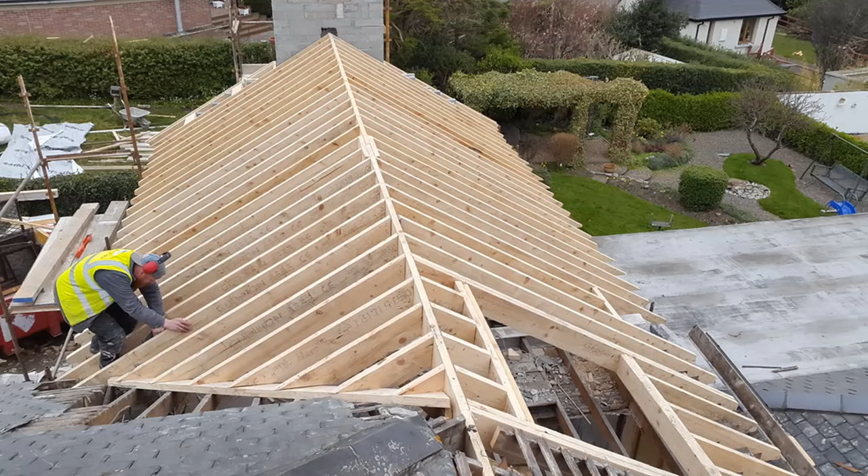In today's lesson we're going to look at drawing out the passive detail for the eaves of a roof. So what we have here, this is done in block construction. So we have an outer leaf of 100, we have a cavity of 250 mils, and then we have an inner leaf of 100 mils. We have an insulated block in this location here.

What we have then is a wall plate up here, a standard wall plate of 100 by 75. We also have another wall plate positioned here to take the weight of this rafter because of the wider cavity now. And what we also have here is a lot more insulation.

So we have 300 insulation in the attic here, we have rigid insulation between the rafter, and then we've rigid insulation finishing off the top of the cavity here in the wall. And then also we have an insulated plasterboard on the underneath of the ceiling here.

So to start off this drawing, we'll begin with the wall. So to begin with the wall, what we're going to do is measure out 100 mils. So this is going to be drawn scale 1:5, so I measure out 20 mils here, then I measure out 50 mils, and then another 20 mils here. So this will be all drawn to scale 1:5.

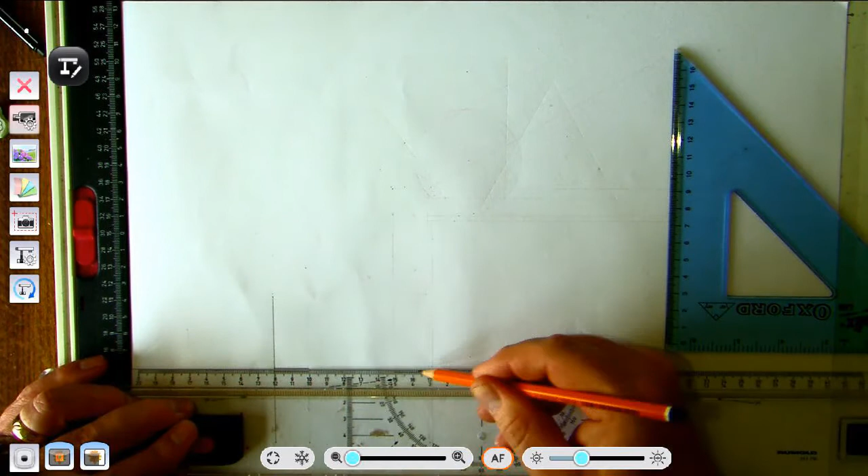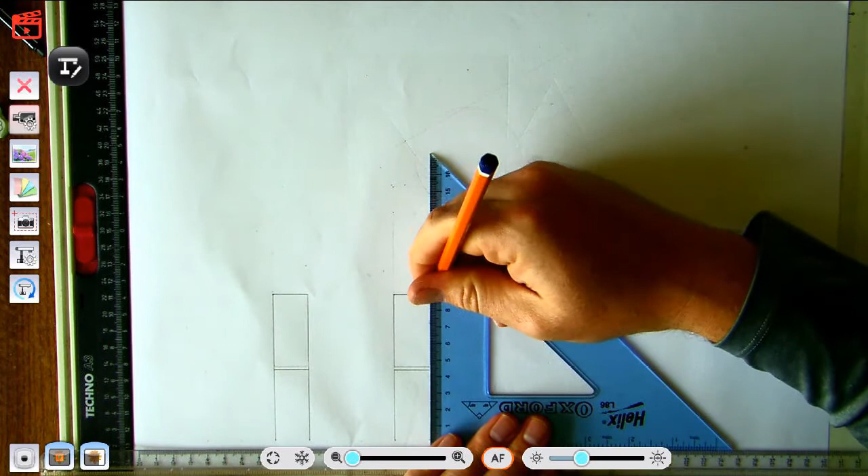So that's my outer leaf done. Now to do my inner leaf. Now above the inner leaf, what we have is another 10 mil gap here. So we measure that here, and then we measure up another 215. And this is for our lightweight insulated block.

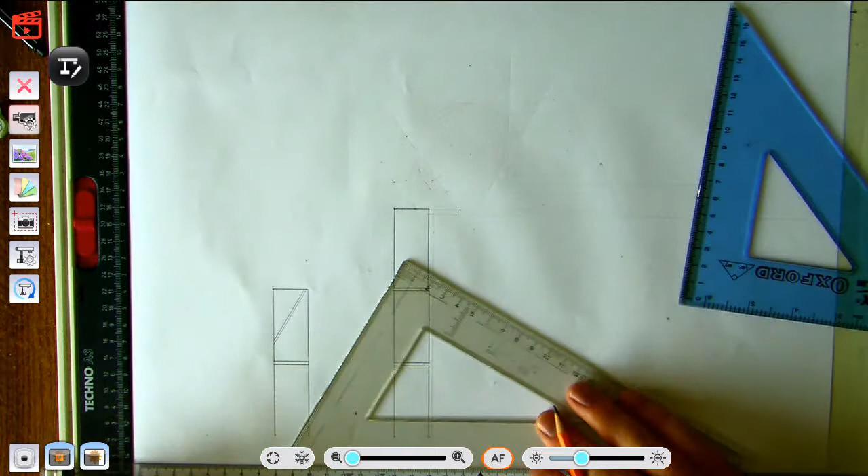And then it's a good idea at this stage to start drawing in symbols for the blockwork. So the symbol for the blockwork is, I tend to use two lines at 60 degrees close together. And then we do the inner block here. I just staggered over two blocks in this case here.

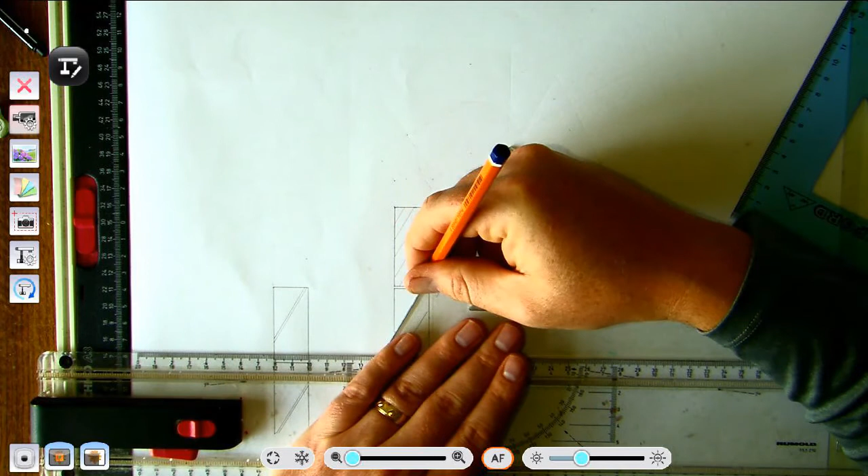And then for the insulated block we do it slightly different so we can see that it's a different type of block. So I'm going to draw a series of lines at 60 degrees. So that we can see that there's two types of blocks drawn here.

Now, from here, we're going to draw a wall plate. The wall plate is 100 by 75, the same in passive construction. So what we're doing here is measuring up 75. And again, remember, this is scale 1:5, so we're measuring up 15, and we're measuring across here 20. Now, because it's a wall plate, we know it's a piece of timber, so we're looking at the end grain, so we put in the symbol for the end grain, which is an X.

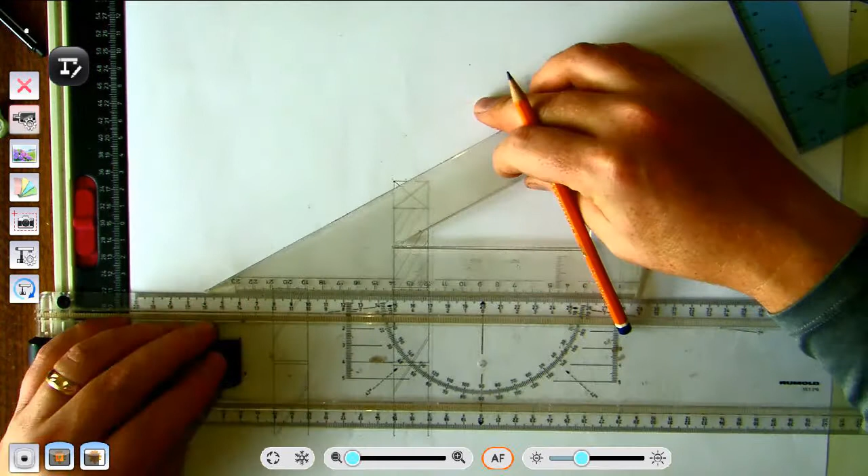Next, we're going to draw in the rafter. So, to draw in the rafter, we start at the edge of the wall plate, the outer edge, top left hand corner, and we draw a line here at 30 degrees. So this is the same for any pitch roof drawing, that we start off here. Or we bring down this line 30 degrees.

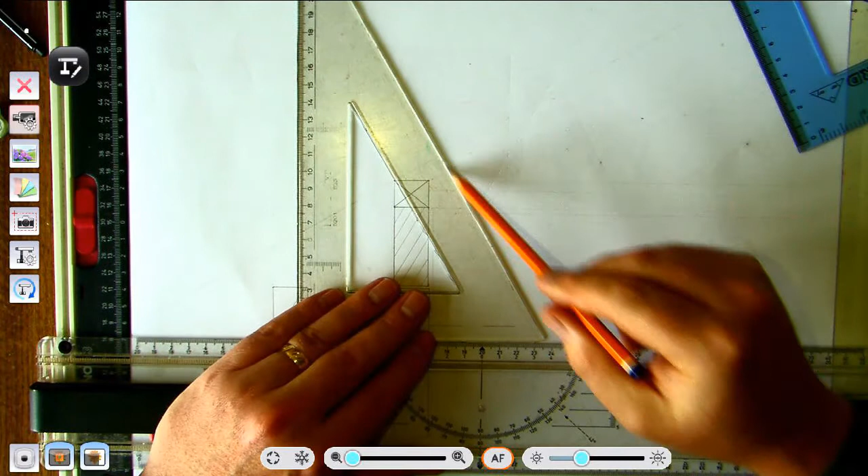Now we set up a line here at 60 degrees, and then what we're going to do is measure our rafter. So our rafter is 150, so we're going to be drawing it 30, so we measure out 20 and measure down 10. That gives us our top and bottom. So what that allows us now to do is we can draw in the bottom of the rafter. So this here is the bottom of the rafter, and then I'll continue on the bottom of the rafter.

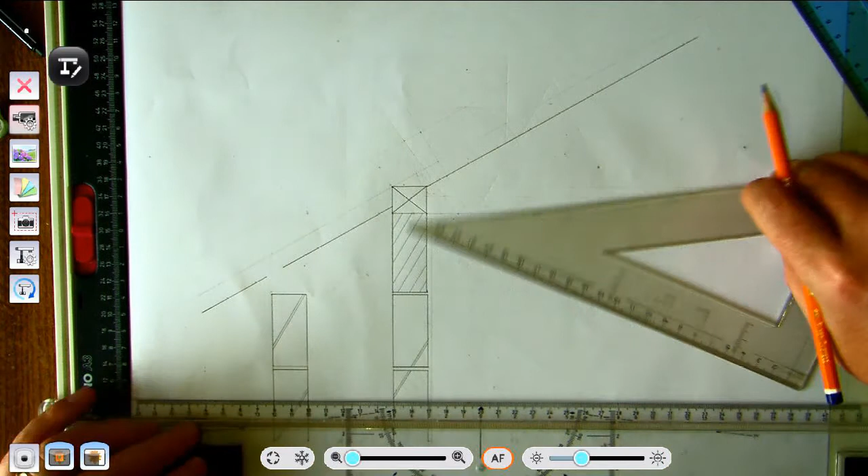I might leave a small gap here because I'm not sure where the wall plate's going to intersect with it, and then I'm not going to bring it down here fully because I want to see how far out we're going to put our soffit and fascia. Now, while we mention soffit and fascia, we might as well do a bit of measuring for it.

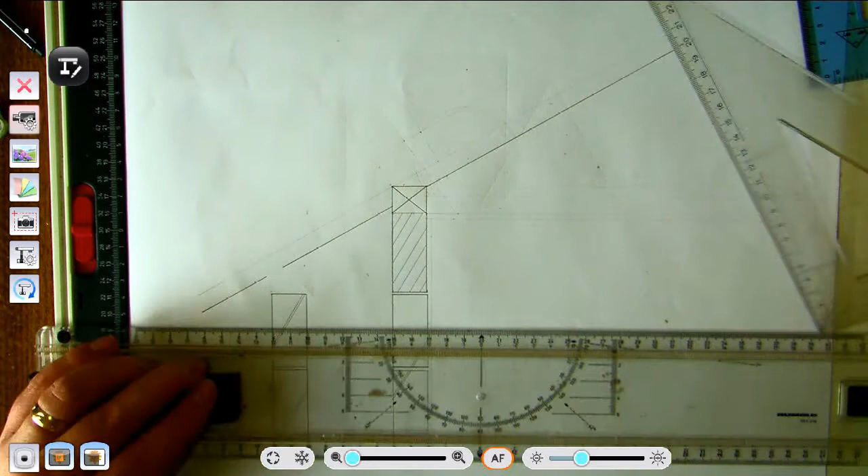So what we'll do in this case here, we'll put on soffit and fascia of 300 mils. So what we're going to do is measure out 300, bring a line up, and where that line intersects with this first line that we drew at 30 degrees, bring a line in here.

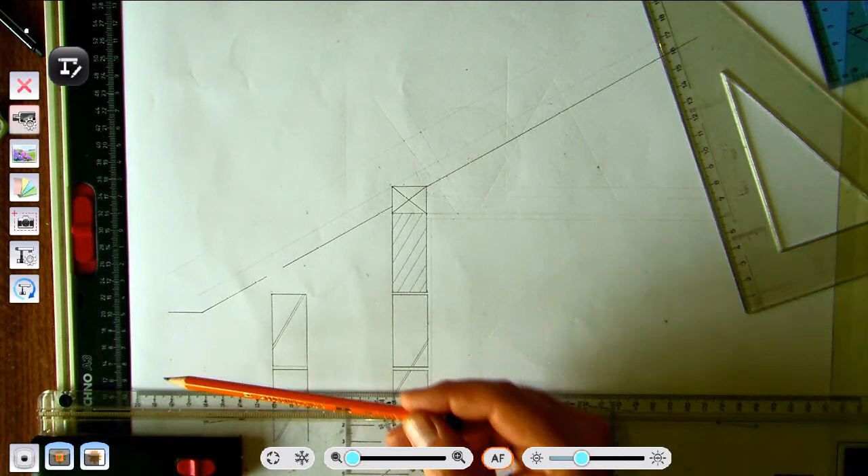So that gives us our bottom of our rafter here. And again, it'll also give us the top of the rafter now because we can extend on this line down. So what we've now found is the top of the rafter here. And how that's found again is from the wall, measure out your 300 mils, bring a light line up where it cuts into this 30 degree line, bring a line across from it, bring a line up, and that gives us our plumb cut and our seat cut in the bottom of our rafter.

So we can draw in the end of the rafter here. Then we could draw in the top of the rafter in a bit heavier now. And we'll extend this up. Wait.

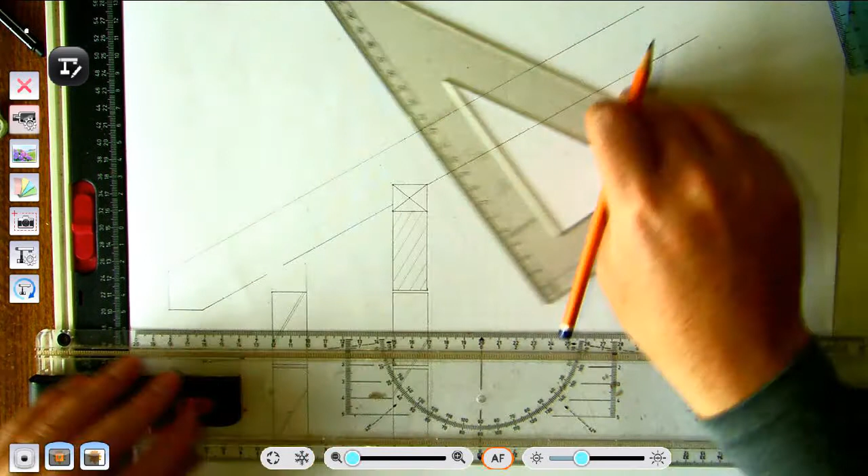Now, with the rafter drawn in, we can draw in our second wall plate. So our second wall plate, again, it's the same size, 75 by 100, so that'll be 15 by 20 on your drawing. So you can see where it's cutting into this rafter here. And again, because it's a wall plate, we'll show the end grain, so I'll X through this here.

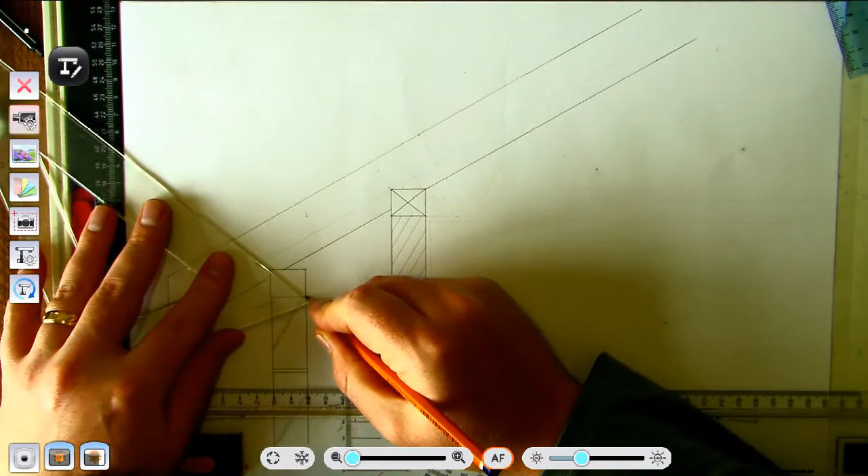Now, once we get to this stage, better start putting in some insulation. So the first piece of insulation I tend to put in this drawing is into the wall here. So I'm going to put in the rigid insulation. So this here is 50 mil rigid insulation. So we'll measure up a line 50 here. So where I measure this from is from the bottom of the wall plate here, up 50, and that's our piece for rigid insulation. So to draw in rigid insulation, what we do here is lines here at 45 degrees.

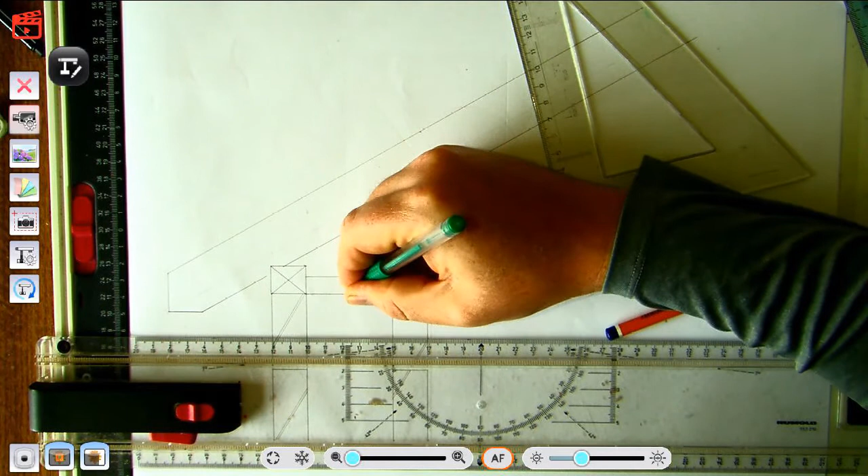Now you could measure how far apart these are, but there's no real need. And then 45 degrees here. So this here is our symbol for rigid insulation.

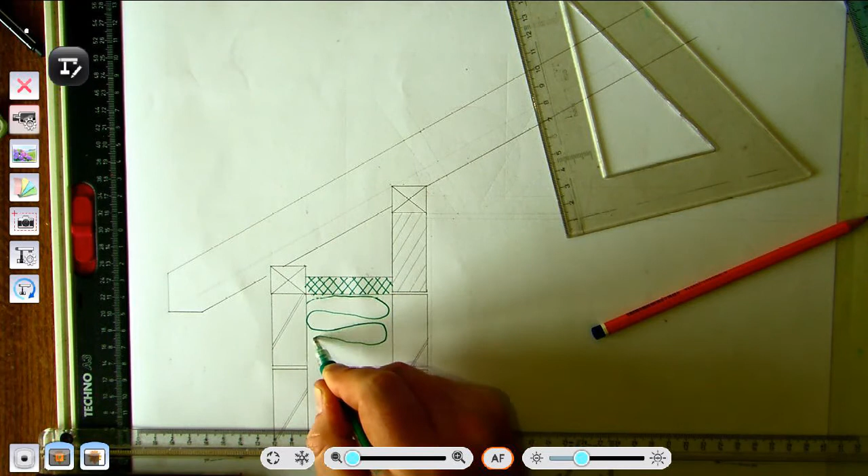Now underneath it now we have loose insulation. So again, the symbol for loose insulation then is more freehand curves. So it's wide here, gets narrow here, wide, narrow, and so on down along. So this just takes a bit of practice here drawing in these. And so on down to the bottom section of the wall that we've drawn in. So that's our loose insulation put in.

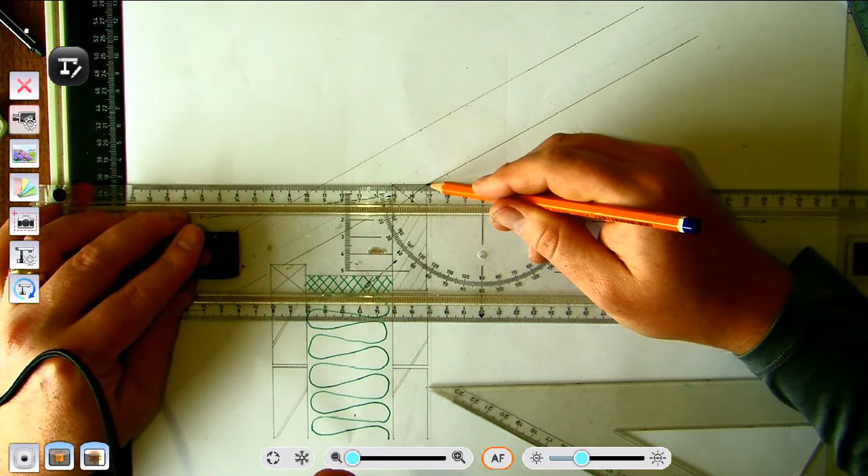Now if we move up along the drawing then, what we have to do is we have to put in some rigid insulation and some loose insulation. So basically when we get to this stage here, what I tend to do is I tend to draw in my ceiling joist. So my ceiling joist, as in a normal not passive construction, your ceiling joist will be resting on top of your wall plate.

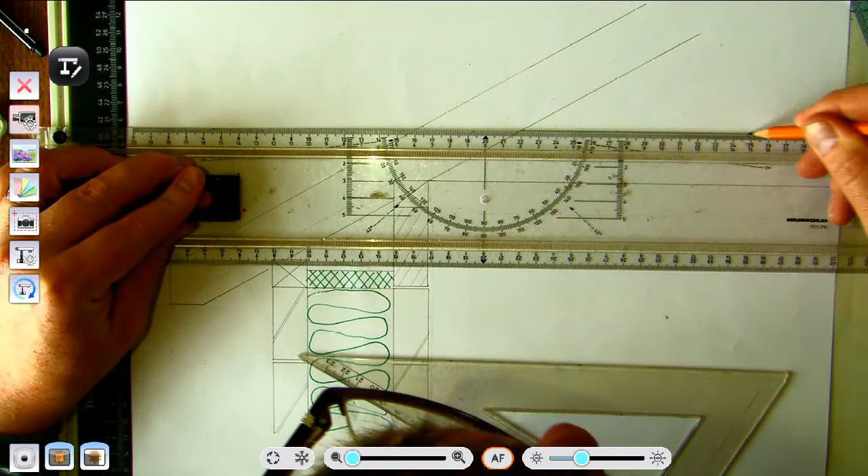So I can draw this in here, and we're going to take it in this question here that there's no room upstairs, so we're going to put in the same size timber as we have for the rafter, so up 150 for the timber. So what we're going to do here now is draw a line across here. So this here is our ceiling joist now put in.

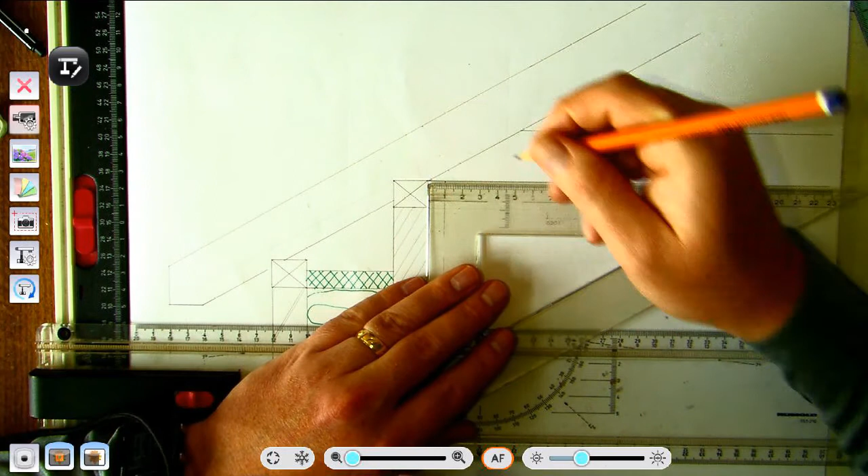Now in this drawing here we're super insulating this house, so what we have to do in this case here is put on battens first of all. So the battens here are measuring across here 50, so we're going to measure across here 50, going to measure down here 25, so we're counter battening this roof here. So in this case here we're counter battening here, and then below this we're going to go 400 centers. So from the center of this one to the center of this is 400, so it'll be 80 on your drawing.

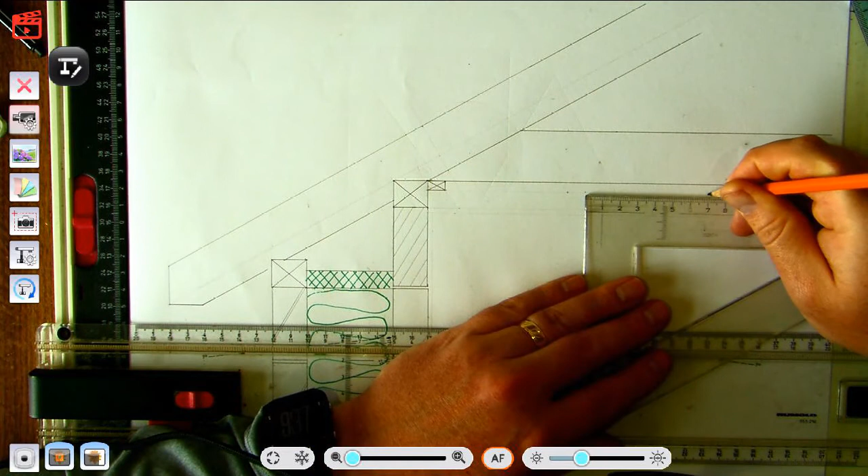Then we'll measure across 50, then we'll do the same for this one here, measure over 400, and what we'll do here then is line up here, line up here, line up here, bring our lines across here. So these are our battens that are 50 by 25.

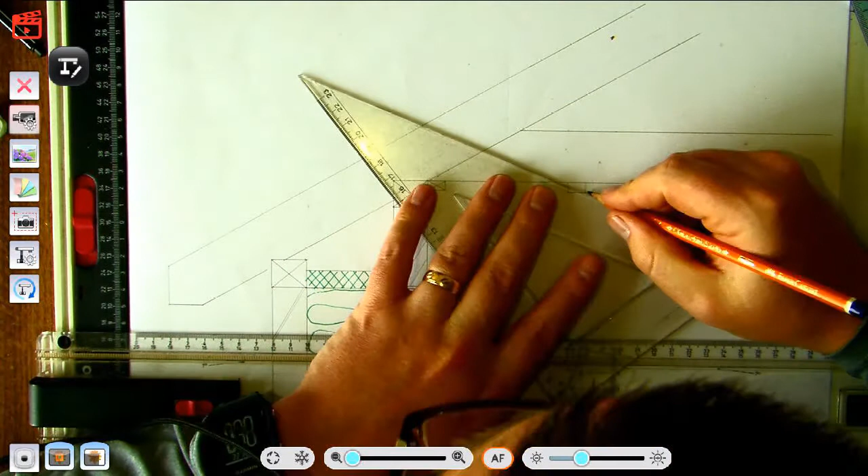Once we've that done, we'll draw a line across here to show the top of the insulated plasterboard. Then we're going to measure down 50. Draw a line across here. And then down 12 mil, which will be probably close to 15 mil, so probably down about 3 mil on your drawing here. Draw a line across here, and that's actually our plasterboard.

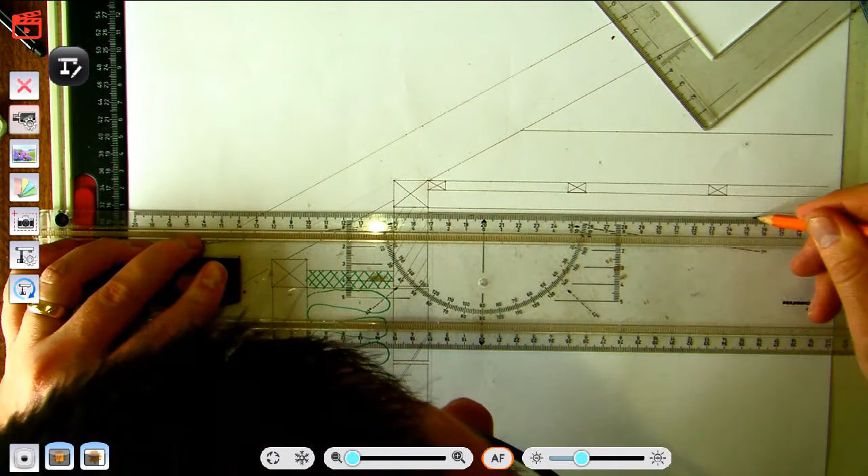Now, while we're at this stage, we might as well put in the plaster on the wall here. So we'll measure out 15 mil. So we draw our plaster on our wall now. So we have our plaster on our wall put in.

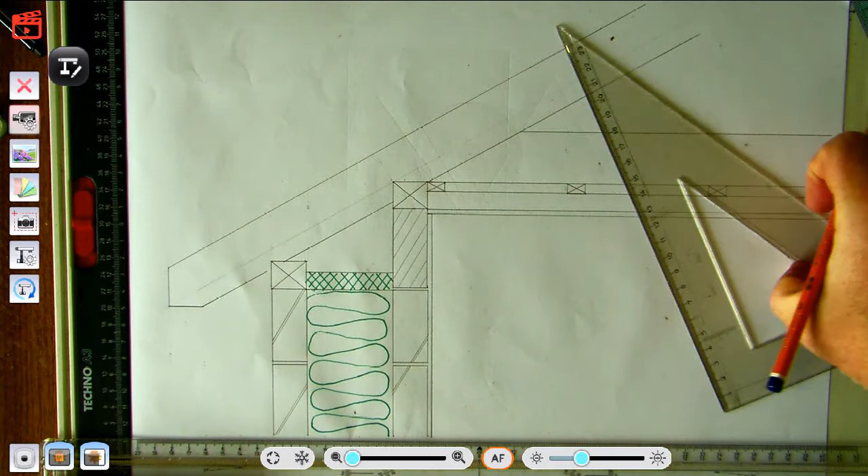Now we might as well put in a few symbols now for insulation. So again, this is going to be rigid insulation. So again, at 45 here. Now this can be done in pencil. I tend to draw it in pen just so that it stands out. Now you just have to be a bit careful when you're drawing it in pen. And then just 45 degrees in the opposite direction here then. Now you could put in as many of these as you want and as close together as you want.

So that's our rigid insulation put in for our plasterboard. Now when we're at this stage here, we're as well to put in our airtight seal. Because it's passive construction, we have to have this house airtight.

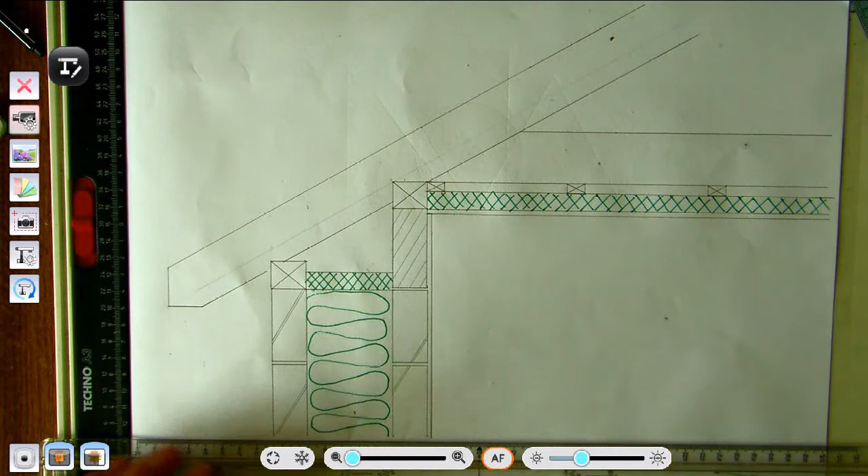So our airtight seal is an angle here of 90 degrees. So it's a tape that's put onto the wall and put into this location, so it's taped in here so that any heat from this room here gets to this point here and won't travel any further. Okay, so that's our airtight seal, and that's where we place it in our drawing.

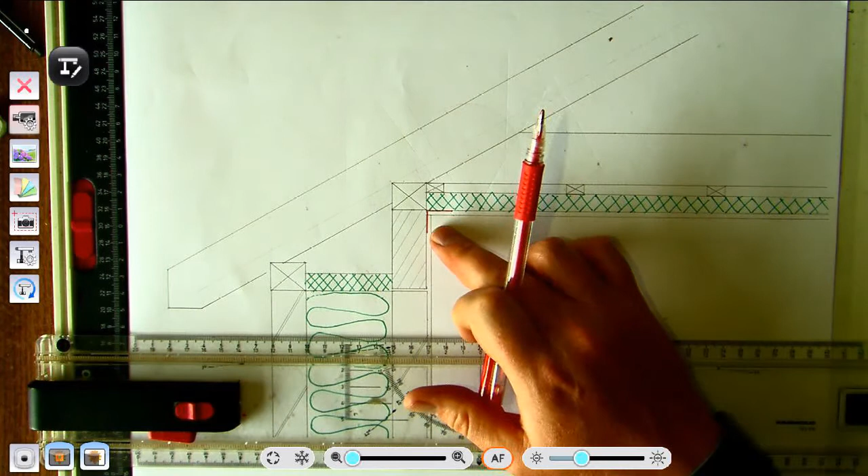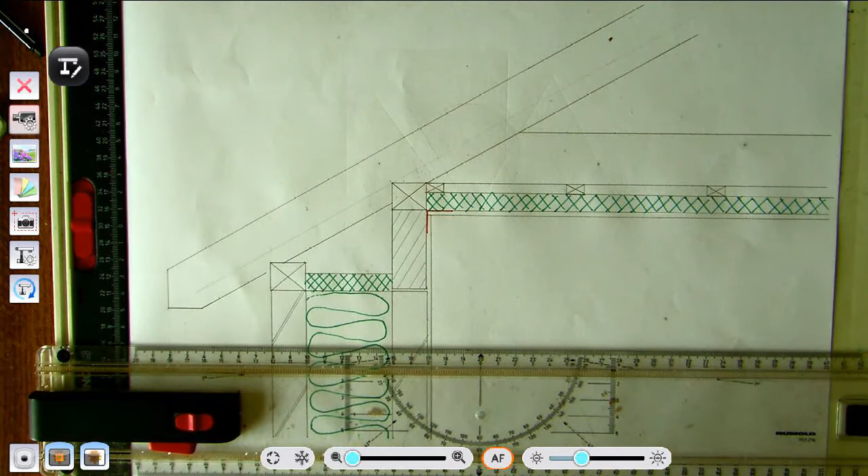Next we'll look at putting in some rigid insulation now into the actual rafter, because once we have the rigid insulation put in, we can start putting in the loose insulation. Loose insulation is a lot easier to put in. So on the drawing here, I'm going to measure down 30 mil, pick a point there, then with my 30 degree set square, draw a line here, so this is going to be a heavy line.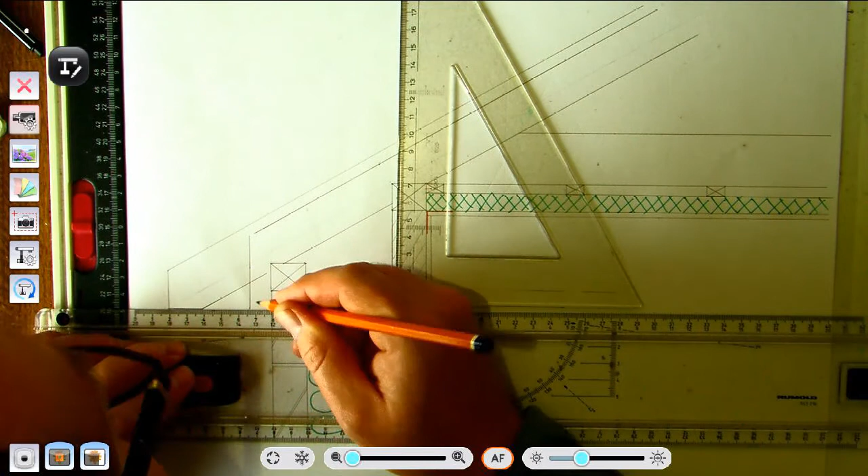And what we're going to do in this case here is put in 60 mil of insulation. So from this point here in the wall plate, I'm going to measure out 60 mil, bring a line straight up, and then to find the lower point here, bring it level with the seat cut on the end of the rafter. So that's the end point here for that rigid insulation. And again, the insulation was 60 mil, so I'm going to measure my 60 mil here.

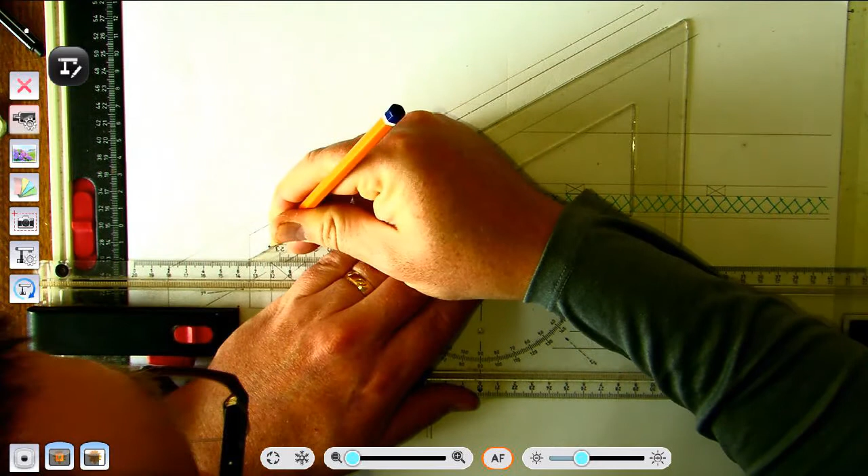Now what we don't have in this drawing here is an eaves ventilator. The reason we've no eaves ventilator in this drawing is we're going to have a gap along here. You'll see it a lot clearer when I put in the symbol for the insulation. So we've no eaves ventilator in this drawing question because of the way we're putting in the insulation. So again, this is our rigid insulation. There's quite a lot of rigid insulation in this question here. So put in our lines here, all the way up along our drawing.

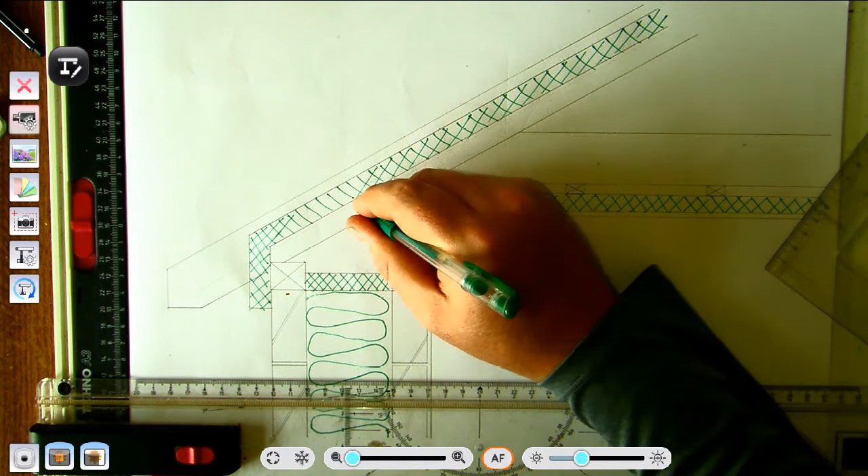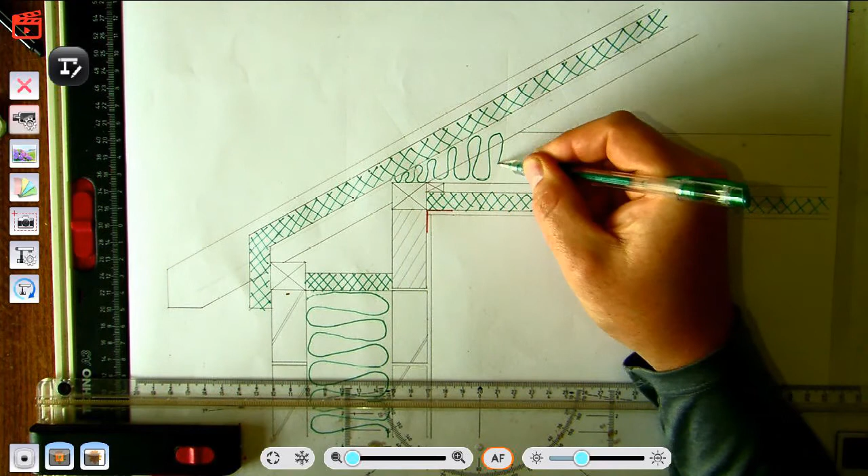So that's our rigid insulation now put into our drawing. Now when we're that much done, we can start putting in loose insulation. The loose insulation in the attic, there's going to be 300 mils of it. So first of all, we start off placing it in here, and obviously it's done in layers. It's packed up along here. So the first one goes up to the top of the ceiling joist.

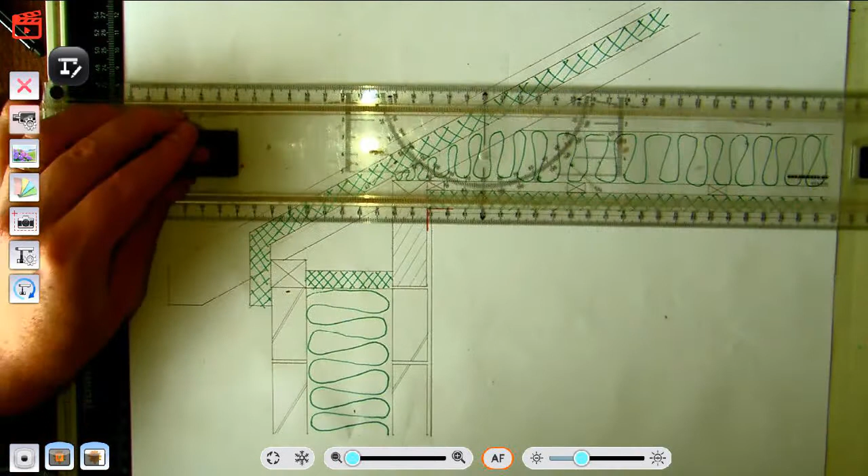And again, symbol here. It just takes a bit of time to get used to drawing it, going wide and narrow, as you're putting it in here. So that's 150 mil insulation. What we have to do now is draw in another 150 mil above it. So on our drawing here, we'll measure up 150 mils. Draw a light line across here, because the heavy line is for the timber. So we're going to start here somewhere again.

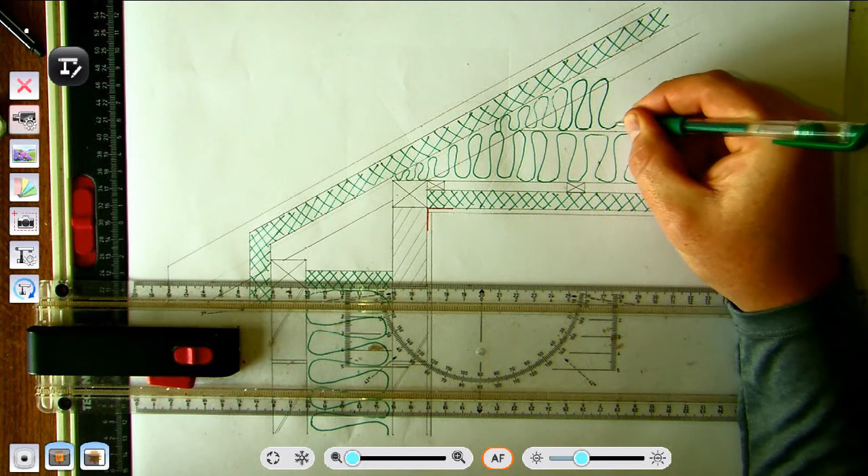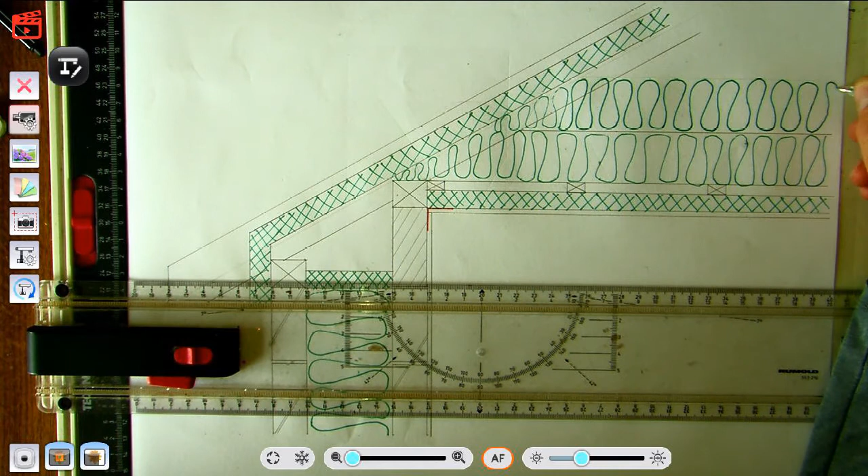So this here is our final piece of insulation in our attic. So we've all this section now filled with insulation. Next we have more insulation to put in. The last piece of insulation is all this section here has to be filled with insulation. So again, this is going to be loose insulation. So again, we go wide, then narrow, wide, narrow, and so on.

Right, so that's all our insulation. Now, that completes all the insulation in this drawing. So what you'll notice now is this house is super insulated. This is what it's called super insulated when we put in this much insulation into the drawing.

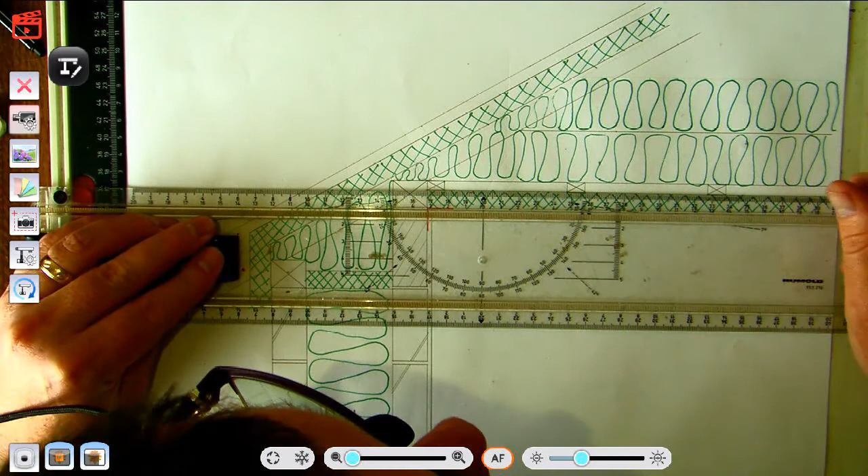Now to move on from there, another detail that's found in passive houses, we have a vapor barrier. A vapor barrier is basically a sheet of plastic that is put between the ceiling joist and the actual ceiling itself.

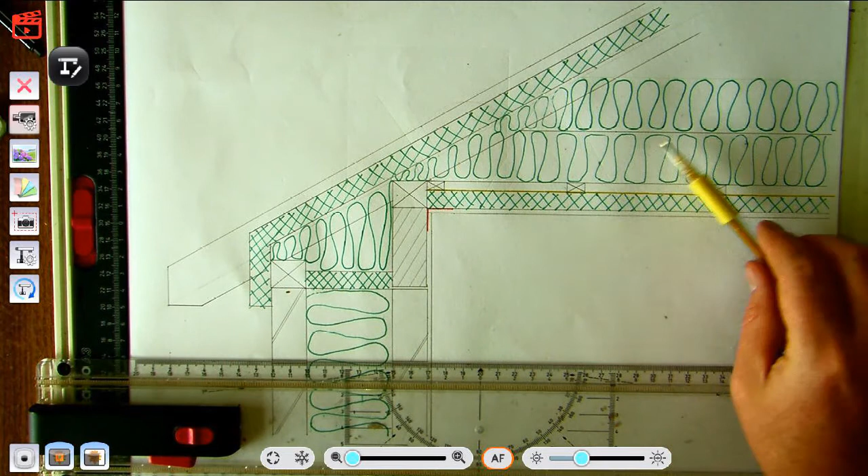So what we have here is a sheet of plastic going across here. Now the reason it's put in is vapor. If we think of vapor, we think of water vapor. We don't want any water vapor getting up onto this loose insulation, because if this loose insulation gets any moisture in it from water vapor, say for instance in a bathroom or a kitchen, it's going to leave this insulation not as effective as it should be.

So this here is the location for our vapor barrier placed in along here. So it's just a yellow line on our drawing here. Now we move on from here, we'll take a look at dealing with the actual soffit and fascia over in this location here, and we'll start putting on a few tiles onto the roof and a bit of maybe felt as well, or breather membrane, which is now used, and we'll put in our gutter as well.

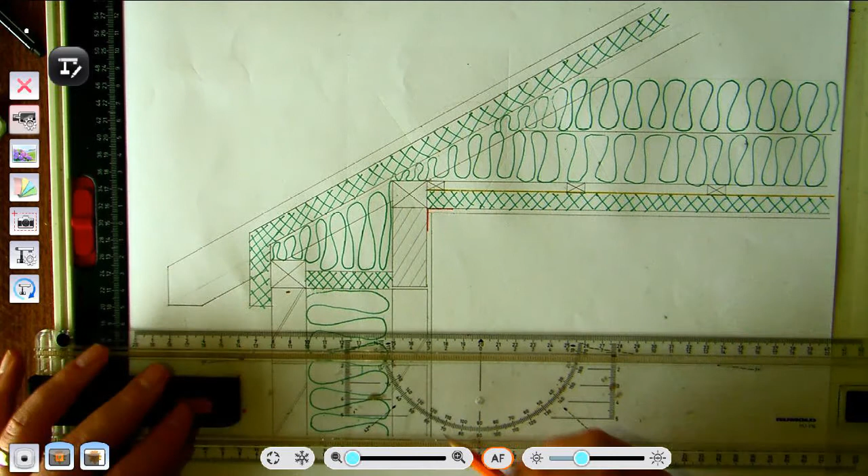Now, to start drawing in these details here, the first detail we'll put in is a line going across here. This here is the top of our soffit, so we'll measure down here, and we'll say it's a 20mm piece. So we're going to measure down here 20mm. So this here is our soffit put in.

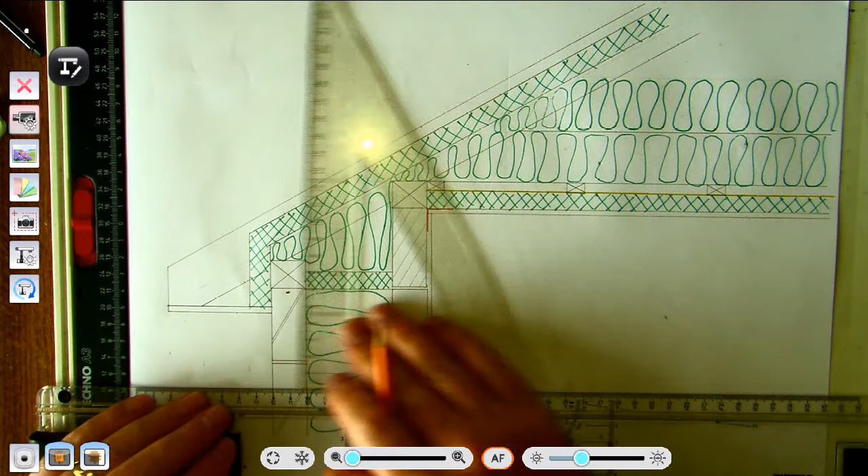Now what we'll do here is we'll just draw another line here, or a series of lines here. The series of lines here will show where the vent is. So we've a vent here allowing air to go up through here and vent the whole roof, so that we've no likelihood of dry rot occurring in our roof.

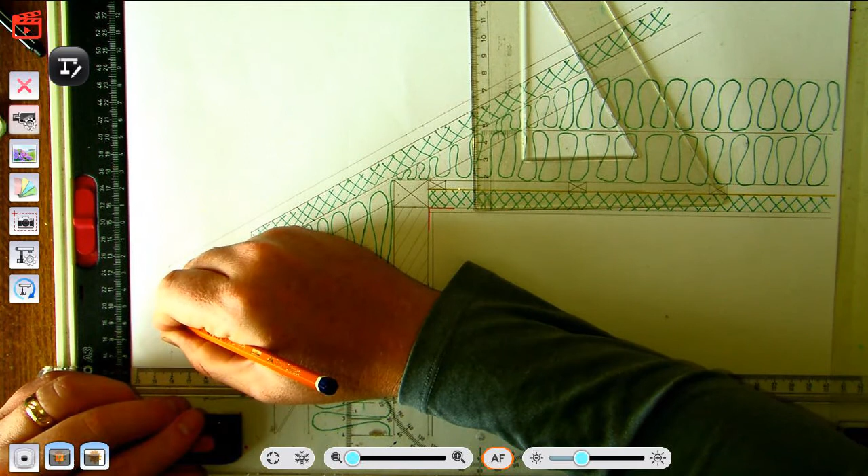Now next thing is we measure out another 20mm here, and we measure out for our fascia. So measuring out for our fascia here, two light lines. Now we'll bring it down maybe 20mm past. Measurement here is not that important, how far down we bring it past. Then we'll bring it out here, and normally on the bottom of the fascia you'll notice there's a few rounded mouldings, just to show a design on the bottom.

And then to get the top of the fascia here, again, measurement not crucially important, we'll measure up 10mm in this case here. So we'll measure up here 10mm. Now bring a line across here.

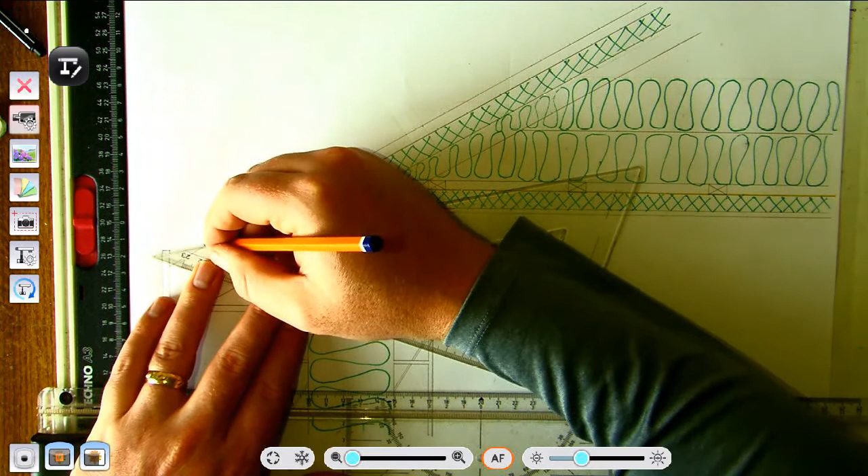Now what we'll do in this location here is we'll draw in a sloping line. The sloping line here is actually a really important piece. That's called a tilting fillet. So this piece of timber cut in this triangular shape, the tilting fillet, and its main function is to stop the breather membrane from sinking down into this gap here. So you'll see now I'll draw in the breather membrane.

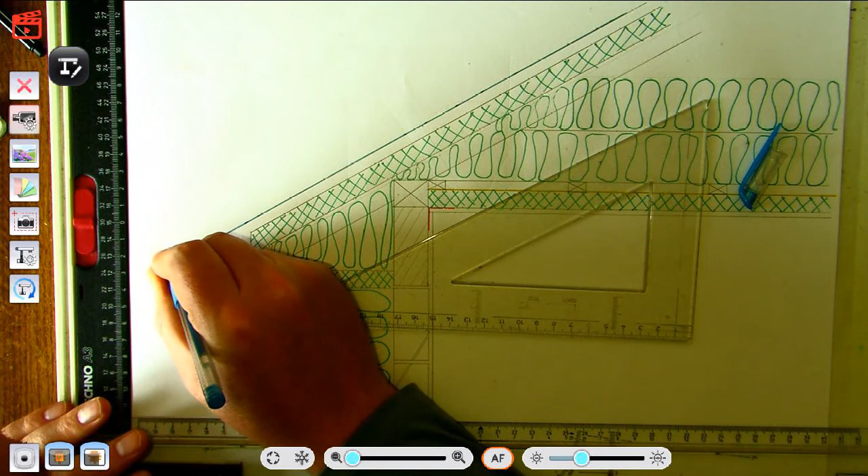So in this drawing we'll draw it in maybe in a blue pen so that it's different to the rest of the drawing. This used to be referred to as felt, but now in all roofs felt is no longer used, it's all breather membrane. So it's this blue line going across here, on top of our rafter, then on top of our tilting fillet, out across the fascia, and then sags down here. It goes into the gutter at the end of the sheet. So we'll be able to draw in the gutter in a few minutes.

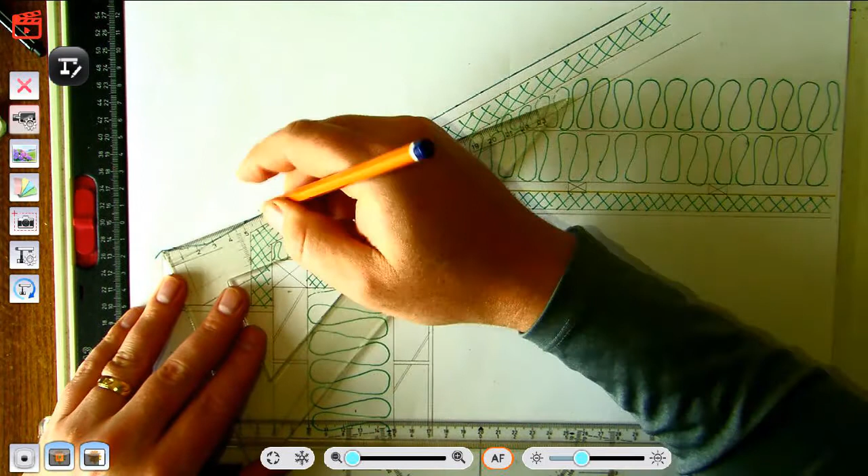Now next we'll start measuring out for our tiles. So we'll put tiles on this roof. For the first point here, from the corner of our fascia, measure up 300 mil. So make a mark there, and then from that mark measure up 300 again. So on the 300 mark we're going to put in our battens.

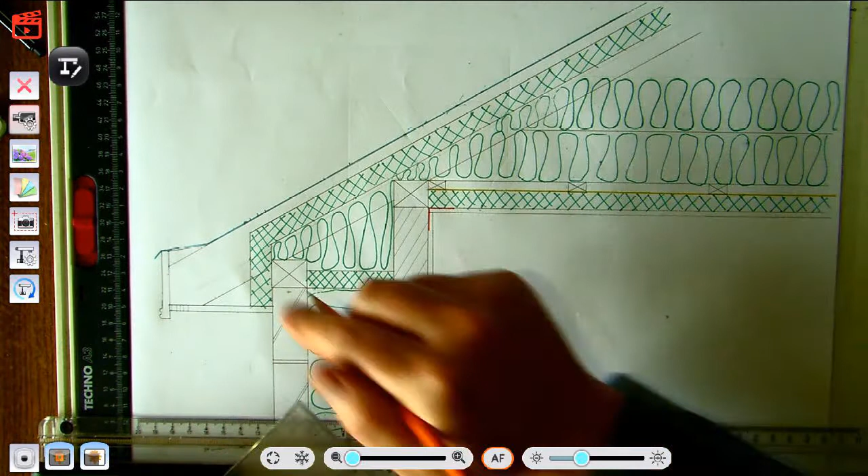So in this case, because we're putting in tiles, from this 300 point we measure down 25 mil, up 25 mil, and then measure out here 35 mil. So remember, all of these are to scale measurements. So anytime I mention a measurement, you just divide it by 5. So I'm measuring out here 35 mil, which on my drawing is going to be 7.

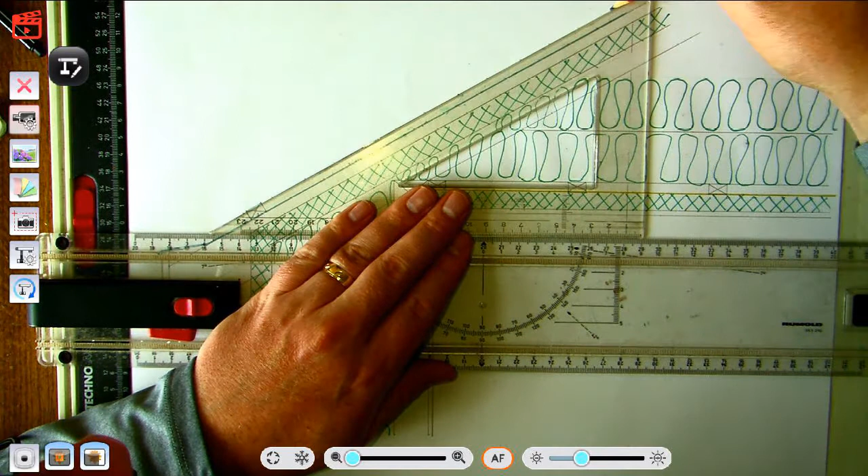So what I've drawn here is our first batten, and you'll notice for tiles they're slightly larger than if we're slating the roof. So this batten here is 50 by 35. Now that's the first one, and the reason I've drawn the first one is, if I bring a light line up now, I'll get the top of the next couple of battens. So I'll tend to draw another 2 or 3 more battens in here. So again, measuring my 50 mil, and then I'll measure up here my 300.

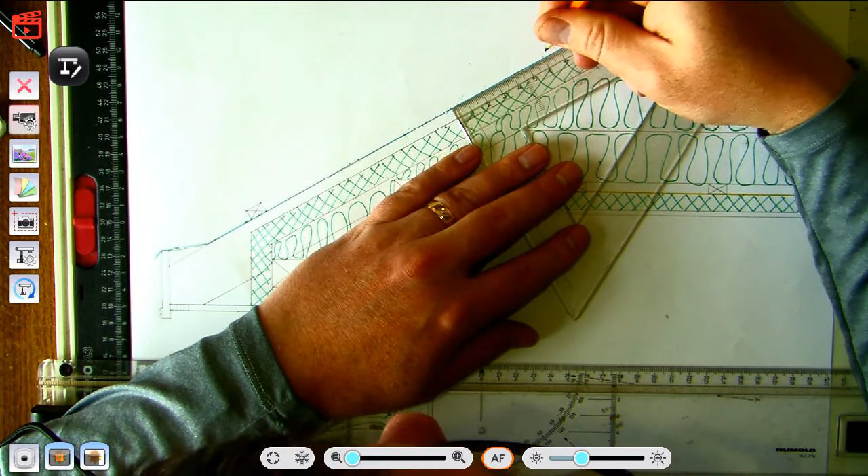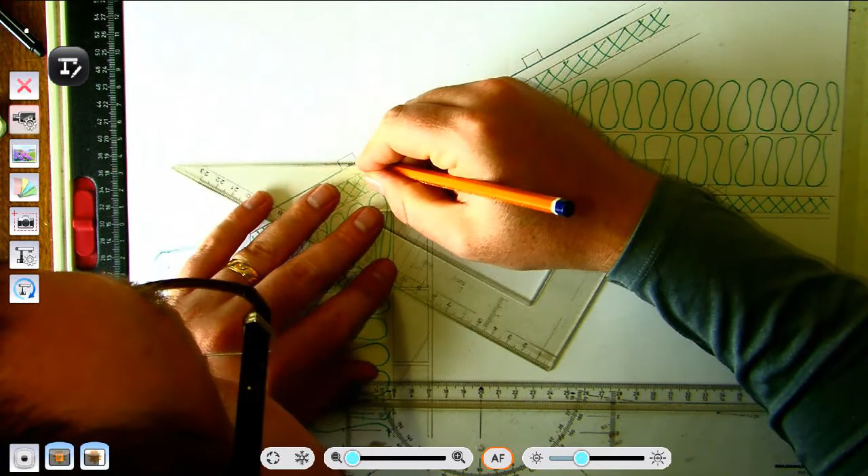I might measure up 300 once more. And because I have the roof drawn at 30 degrees, I'm able to use my set square now at 60 degrees to draw in these battens a lot quicker. Then we draw in the top of these battens. I did put in X's to show that it's end grain that we're looking at, that these are running in and out towards the drawing, so the same direction as the wall plates are. So that's our battens placed in.

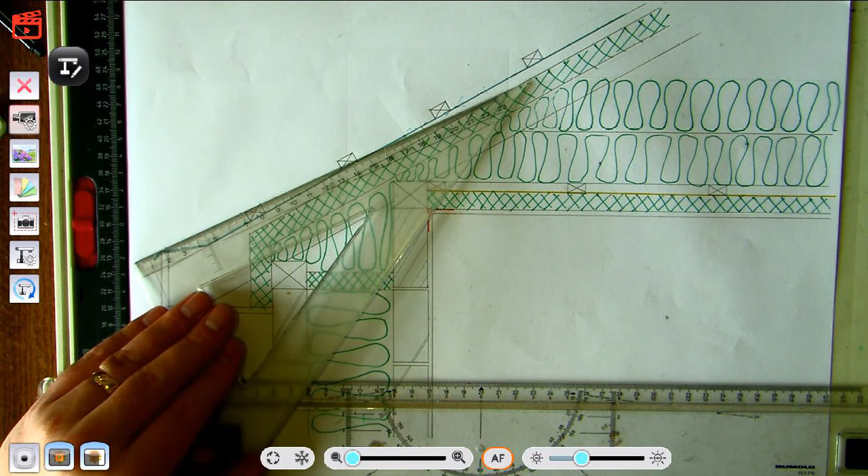Now the next thing that we have to place in our drawing is actually our tiles. So measurements for tiles are 420 by 20 mil in thickness. So basically on this drawing they're going to be measuring, we'll say, 84 mils. So to do this on your drawing, what I tend to do here is go from this point here. So measure down 400 mils. So it's 80 on your set square. So measure down here 400 mils.

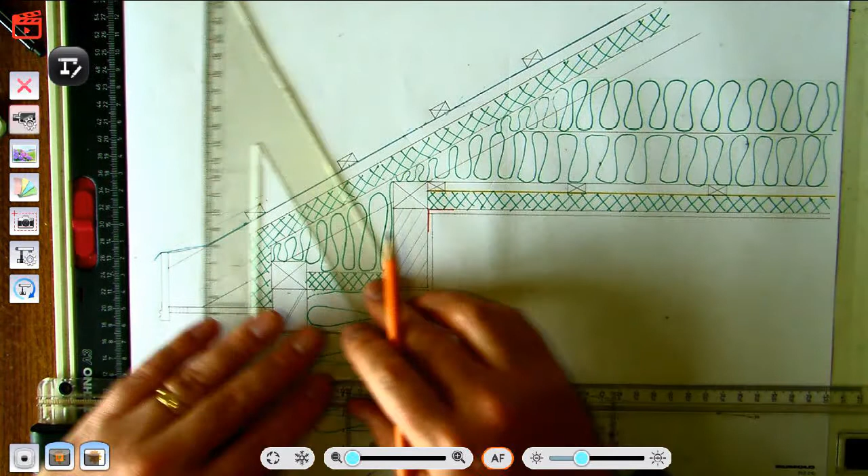Now, because I know this is 84, I'm going to measure back here another 4 mils. Now this is quite an important 4 mils here. What we're going to do here is measure out here 4 mils on your drawing, and somewhere up here, measure out 4 mils on your drawing. What we'll do is set up a light line then on top of this. And what we've now created is the end of the tile here.

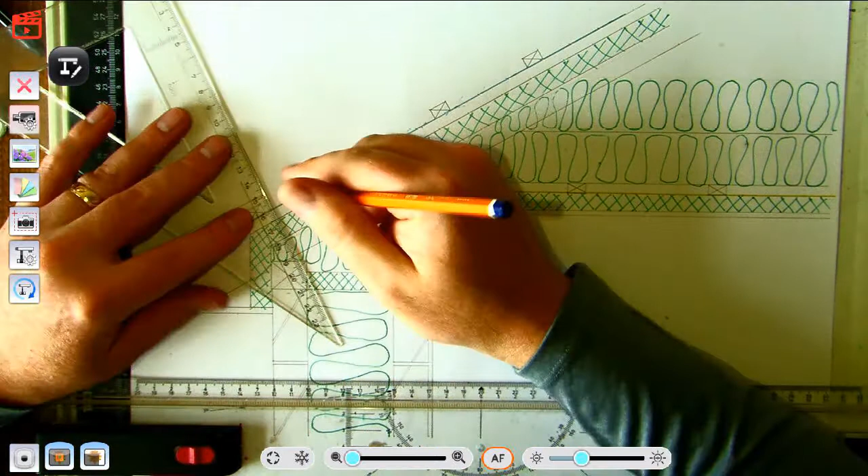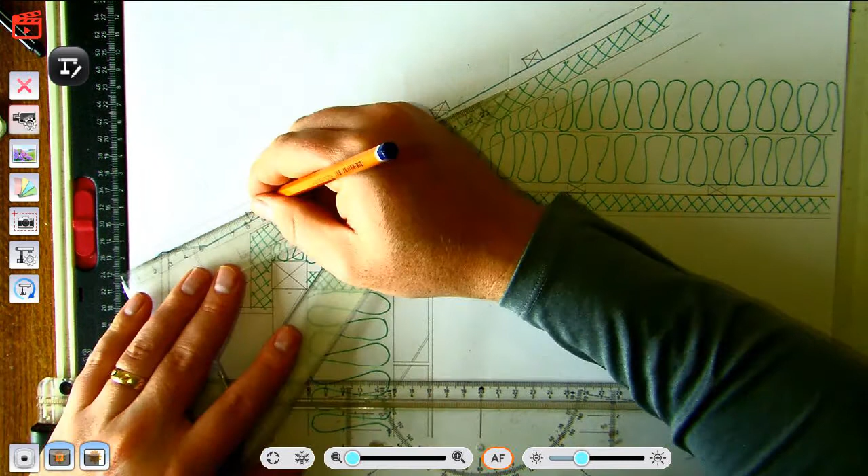Now on the drawing here, because we know it's 84 mils up, we can now measure up our 84. So again, it's 420 when we're drawing it. Then this here is measuring down. In this question here, it'd be 8 mils on your drawing. In reality, it's down 40 mil in real life. So that's our first tile placed on. Now it's a matter of repeating the process maybe twice more.

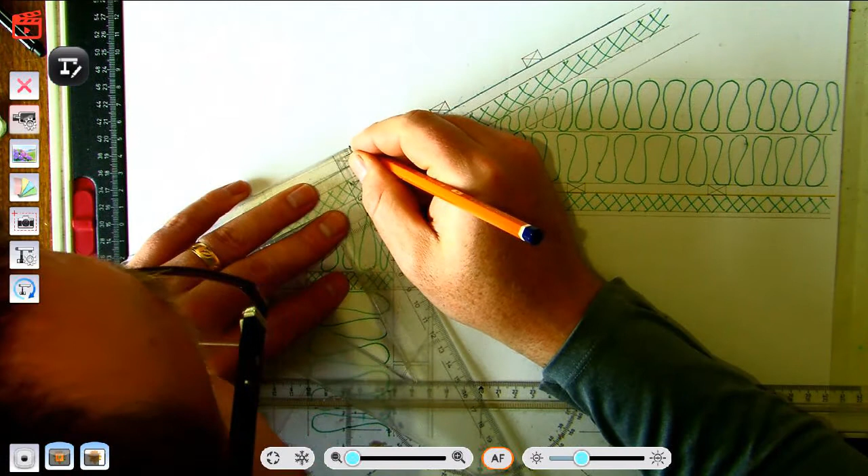So again, from this point here, measure down 400. So 80 on your set square. Pick a point here. Now we can draw this line in heavy this time. Then on this line, measure out your 20 mils for the thickness. So 4 on your set square. Measure out your 4 mils again up here. That allows you to draw this point here, and then from this point measure up your 84. So that gives you the top of your tile. Then down here again 8 mils.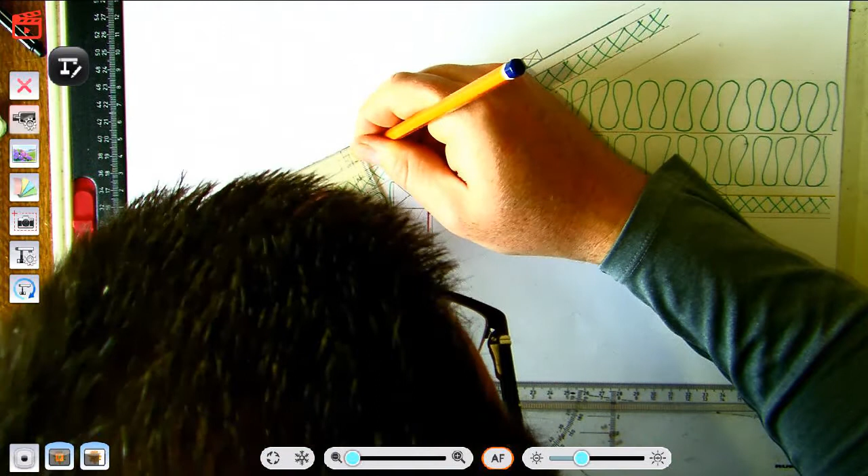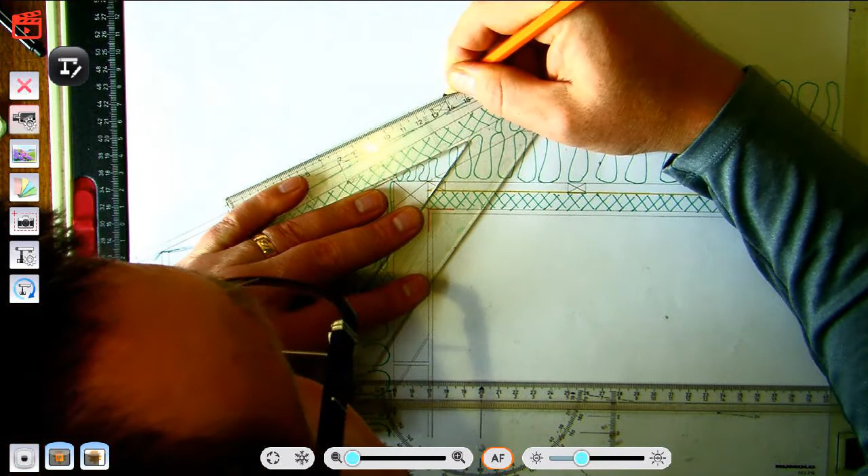Now, as you can see on the drawing here, the way the tiles are put onto the roof is they clip onto the back of the batten. So there's an extra piece on a tile that clips down over the batten. That isn't present when we're dealing with slate. Slates are just completely level, but the difference is that they rest on 3 battens, and the battens are far closer together as well. So it's different measurements, and when you're drawing out slate on a drawing like this, you don't tend to see the size of the slate because they're a lot smaller than the tiles here. So tiles are 20 mils, made from concrete.

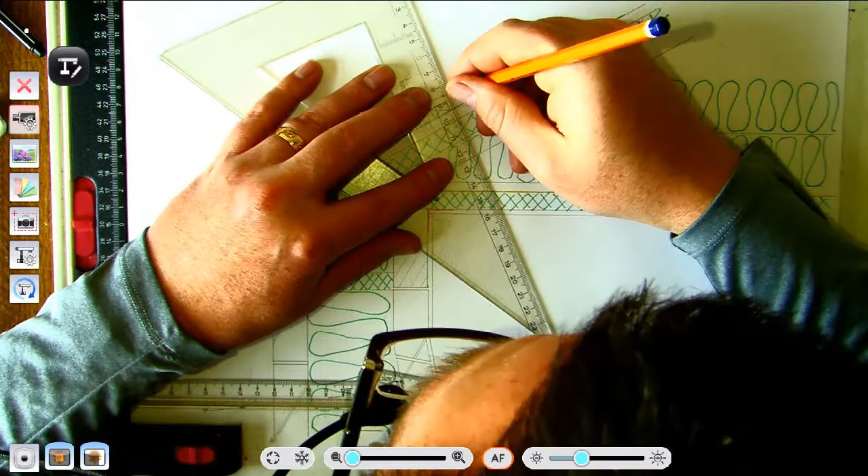So that's 3 tiles, and it's just a matter of repeating this. Now, technically in an exam, normally they just ask for maybe the first 2 or 3 rows of tiles, so you won't have to do it all the way up along the roof. So these here are the tiles placed in. Now, a couple more items to finish on the drawing here. What we'll do in this case here is we'll put in our gutter. So our gutter is out at the end of the page here, so I haven't left a lot of room here for it, but it should still fit.

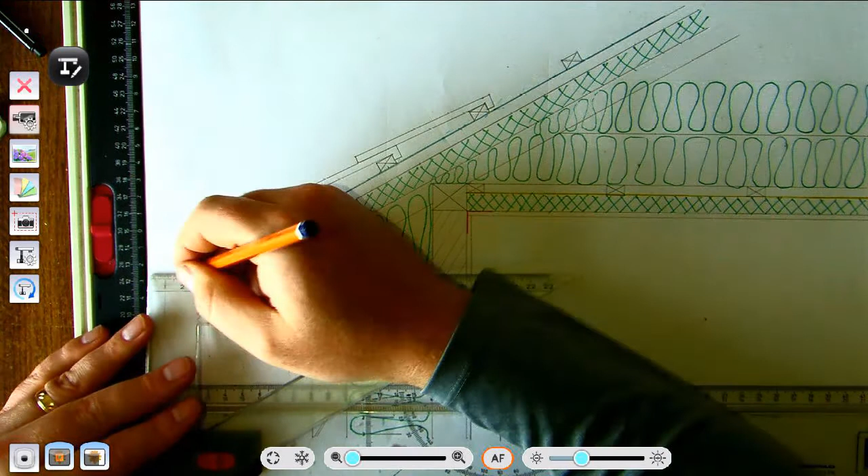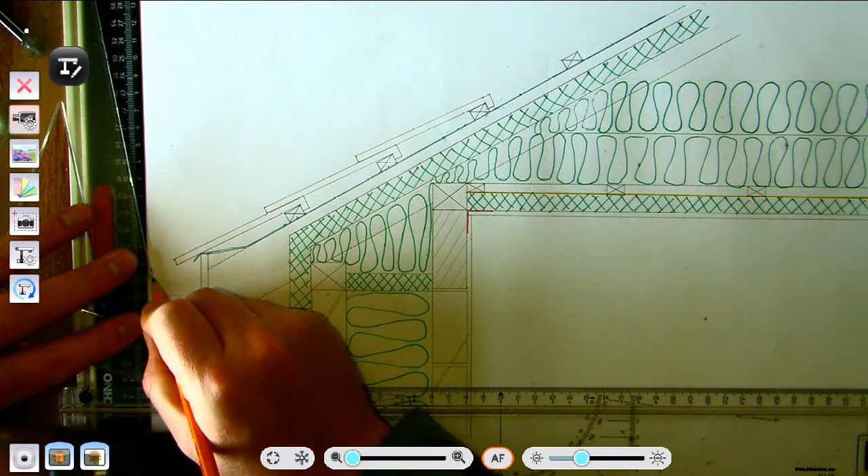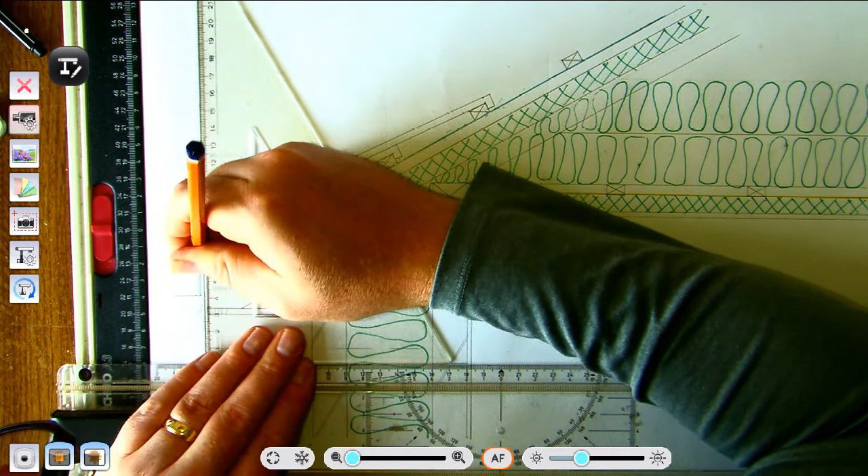So this here is the design for the gutter here. Like in a lot of the books they show rounded gutters, but there's very few houses now that have rounded gutters on them.

Now, when we've this done, we've 1 or 2 other details to put in. What we'll do in this case here is, instead of putting in some drawings, you'll see a batten put in here. So I'll just sketch in a batten in here, right? A small batten in here. We'll say it's 25 mil by 40 mil and put in an X here. That's one method of holding up the soffit.

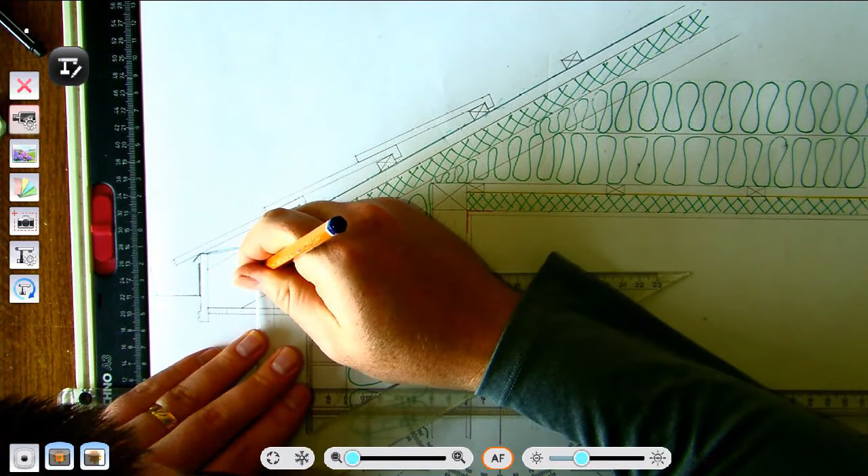Another method of holding up a soffit is if we use this Soffit Ladder here. So basically what a Soffit Ladder is, it's another piece of timber. So piece of timber 75. Now, location here doesn't really make a lot of difference where you place it in here, and we measure up here 75 again.

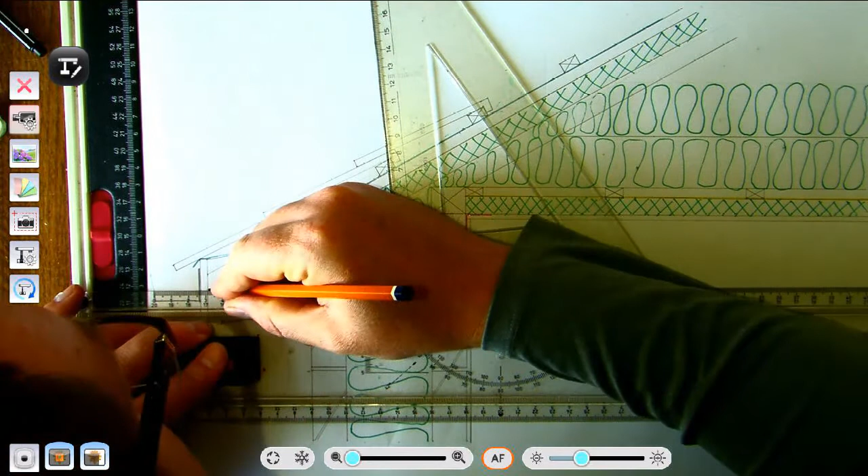Now, basically what we have is a right angle, 2 pieces of timber here making a right angle, so that we can nail this soffit up onto that. So this here is called a Soffit Ladder. Okay, now it will be placed onto about every 3 or 4 rafters. You wouldn't place this on every rafter, there's no need.

Now, when we're looking at the drawing here, what we'll also do is put in a bit of plaster on the outside. So again, we'll put in maybe 15-20 mil of plaster on the outside. So on our drawing here, place in here. Now, for plaster, we might as well put in a few dots here, just to show that it's plaster on the outside. So this will be referred to as render on your drawing.

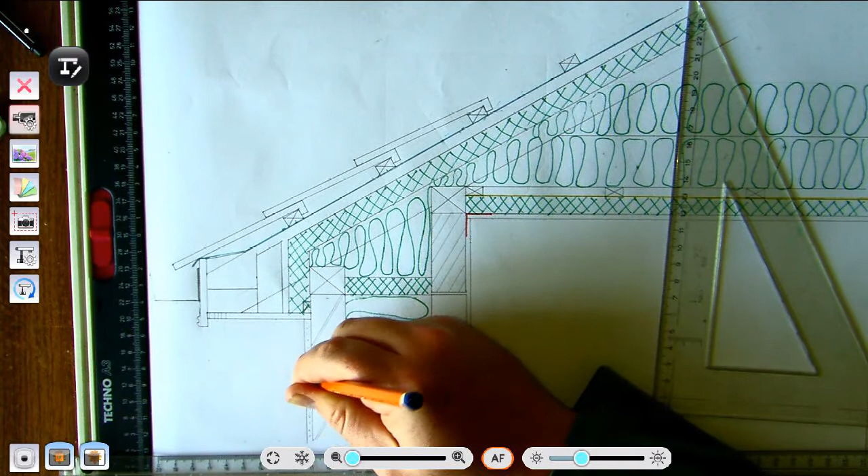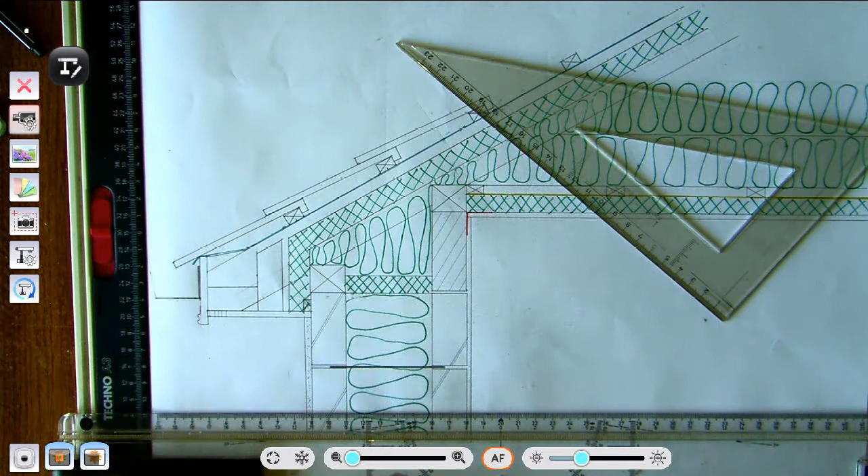And then while we're doing this, we might as well put in a wall tie in here. Now, the wall tie that's used in passive construction is made from basalt. The reason it's made from basalt is it has far less conducting properties. So in most of our houses we have steel wall ties. What we have here is basalt, so that the heat doesn't transfer out through the building here.

Now this finishes off the drawing, and this is just the eaves. Sometimes you might be asked to put in a purlin, so if you have to put in a purlin, you just measure up on your drawing and locate where the purlin is. But this here is just the eaves detail of a passive roof.

Now the next thing to do is to make out a legend. The best place to make out a legend on this one is this location here. You've got plenty of space here, and to start off with the legend, start someplace on the drawing and then work your way to the other part of the drawing. So if I go here, I'm going to go number 1 here for render, 2 here, 3, this here is 4, then 5, say 6, and so on, and throughout the whole drawing place in them numbers.

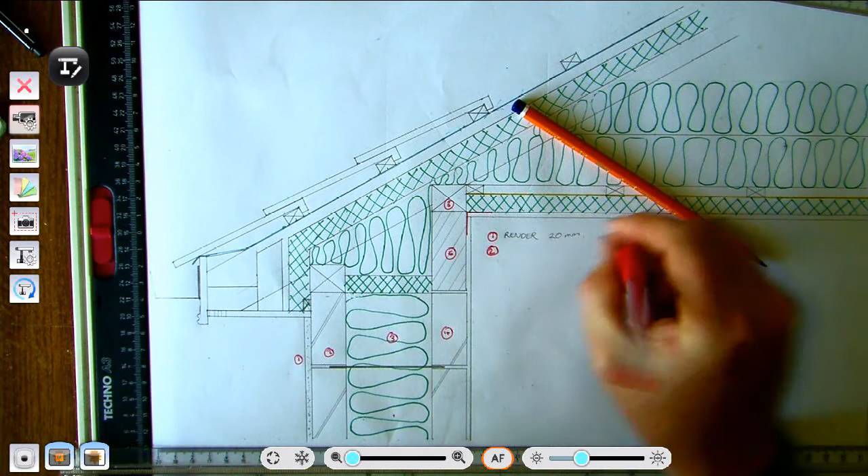Then what we'll put in here is number 1, and then in neat capital writing. The best way to make it look neat is if you put it in blocks. So we're going to write in render, and we'll say the render is 20 mils in this drawing here. Then go to outer leaf, 100 mils, and so on throughout the whole drawing.

So this here is with the legend finished. What you'll see is there's actually 25 parts to this drawing, so I've it labelled 1 to 25. It's not hugely important what order you put them in. For example, I left the plaster, plaster 15 mil, as one of the last things I put in, and if you forget to label something, it's very easy, just stick a number on it then and put it in here. So this is labelled 1 to 25, and the final thing is just put the name of the drawing. So this here is the eaves detail of a passive roof with block construction.

So the other type of question that could come up here is with timber frame inner wall. So that's a slightly different drawing, but the insulation levels are about the same.